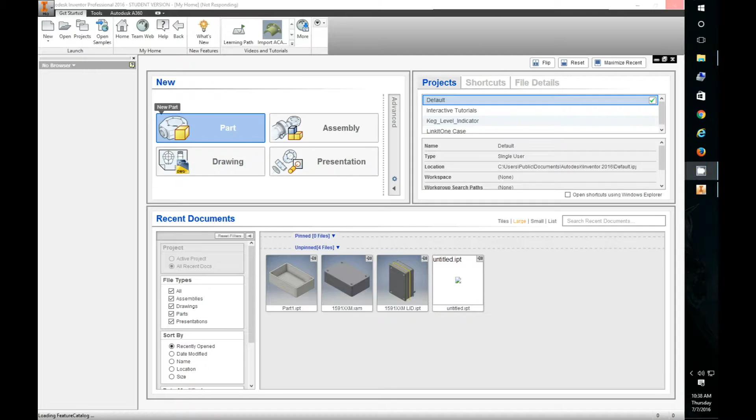So I've got it all set up, so we're going to need a new part. First thing we need to do is create a 2D sketch, so I'm going to click on that. We'll choose the XZ plane, that works fine for me.

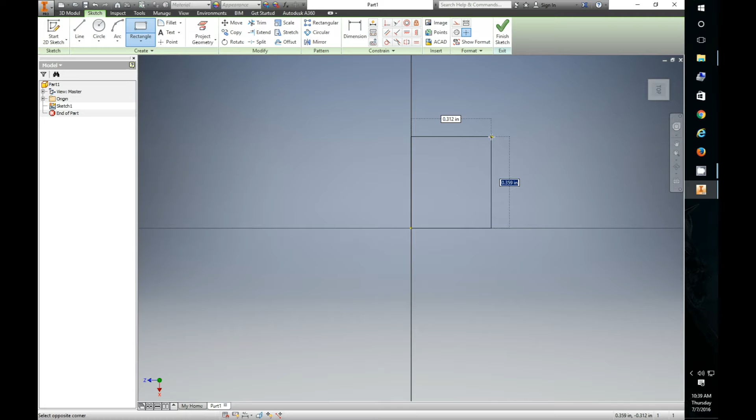Now we're going to go ahead and create a rectangle, so let's make it the outside dimensions of our box. It's going to be 3 inches that way, by 1.855. Okay, so that is our box.

So I'm going to finish that sketch, and then I'm going to extrude this up 1 inch. Now I'm going to move it up a little bit more than that, because when we shell this out, when we hollow this out, I don't want it to punch all the way through the block. So we want it to have inch-high walls, but we need to give a little bit on the bottom for when we punch through it.

If we punch through the bottom, and we did it at 1 inch, it's going to just hollow out this entire thing, making an entire hollowed box. That's not what we want. We want it to have a little bit of a bottom, so we're going to give it a little more, let's give it an eighth of an inch. So we'll bring it up 1 and 1/8 inches essentially.

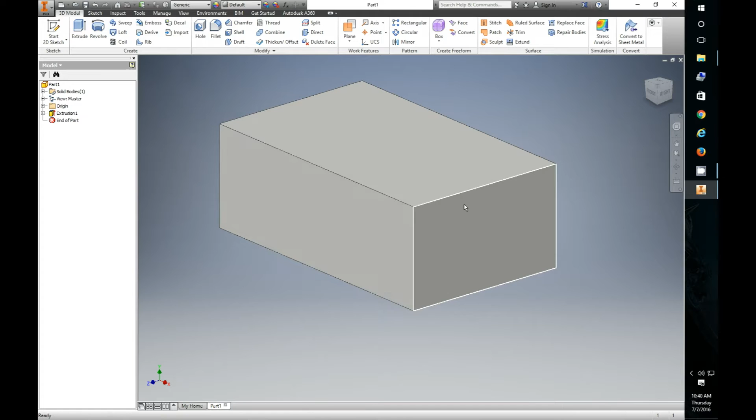So there we go. Now we need to hollow it out. So what we're going to do is right click on this surface, choose a new sketch, and we will create our new sketch.

Since we're hollowing it out, we could use the shell command. Let's see, where was that at? We could use shell, but the problem with shell is it's a uniform scale all the way around. You tell it what thickness and it'll do the same thickness everywhere. Well, ours is going to be a little bit different because we have specific dimensions that we need this hole in the middle to be.

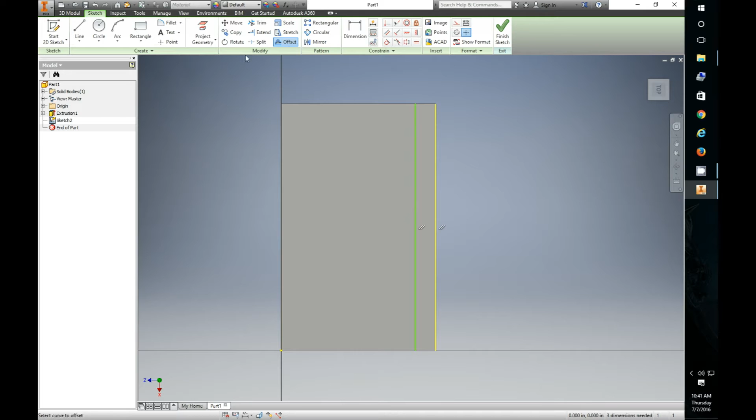So what we're going to do to make sure we get it right is we are going to project geometry. We're going to project this one side to start with, okay, and then we are going to offset that side, bringing it out a little bit. And then we're also going to do the same thing with the other edge, project that geometry and offset that one a little bit.

Now, I don't want this other edge, so I'm going to hit the escape key and just delete it. Now I'm going to dimension these. I need a dimension from here to here. That's fine for now. I also need a dimension from here to there. And that's fine for now.

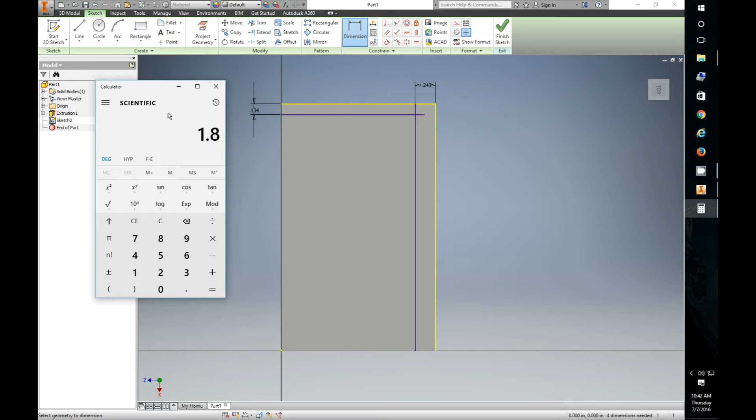Now, to figure out what these dimensions need to be, basically where this box in the middle is going to be, we're going to need a calculator. So I'll bring up our calculator. All right, let's figure this dimension first. We know our total box width is going to be the 1.855. Now we have to subtract the width of the inner box, which is our 1.4. That gives us the total of what's left over.

Now, since we have two sides, the top and the bottom, we have to divide this number by 2. And that should be our dimension for right there, 0.2275. So we're going to go ahead and do that. 0.2275. Enter. So that's our dimension that way.

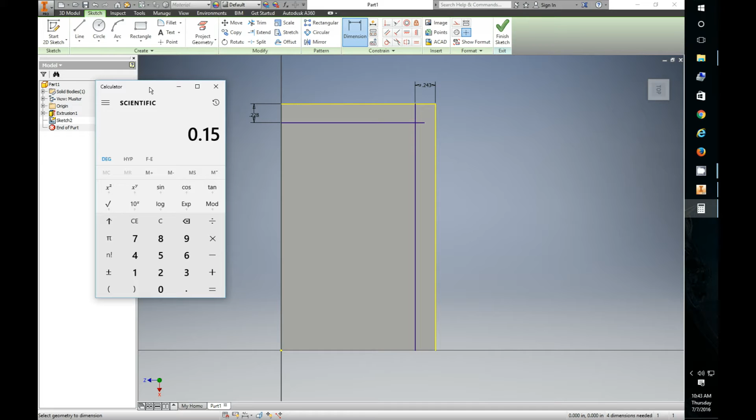Then we pull our calculator back up, clear this out, and do the other dimension the other way. So now it's the length. The length is 3 inches minus our 2.7 inches. That gives us 0.3. We divide that by 2, and we get 0.15. So this one is going to be a 0.15 dimension.

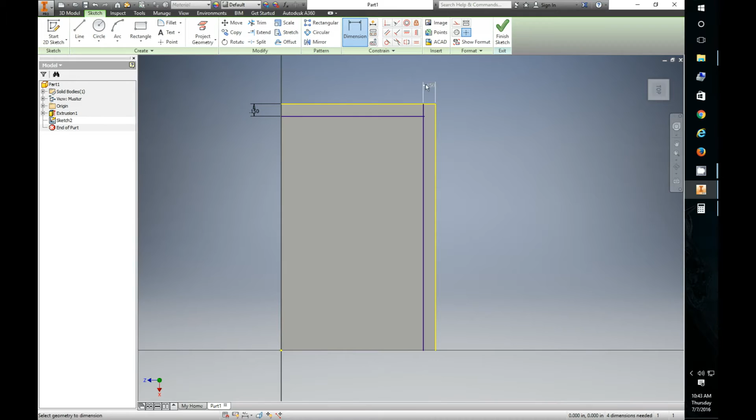And you know what? I think I just quite literally did that backwards. I'm sitting here looking at two different drawings. This one needs to be the 0.15, and this one needs to be the 0.2275. There we go. Sorry, I did that backwards. But basically, you see what I was doing. This one is the width one. That's where we take our two widths, our 1.855 and our 1.4, subtract and divide by 2 to get the width, and then the length is what this one is. You do the same thing. Hopefully that made sense.

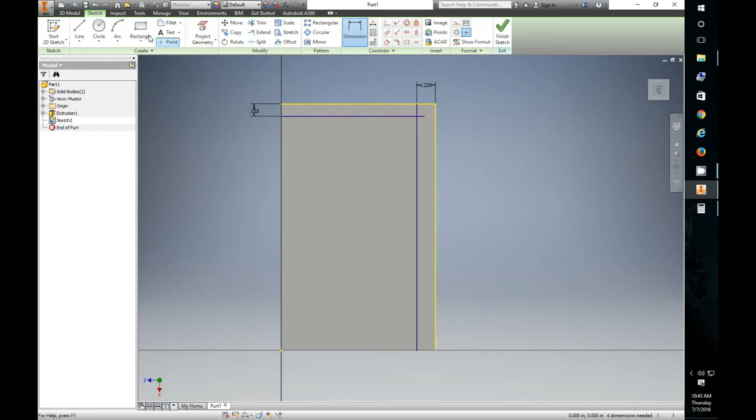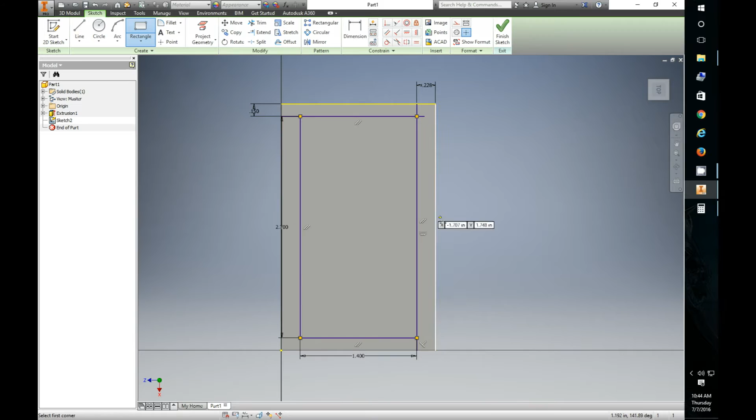So now we've got our corner point. This intersection of these two is the corner point of the box. Now we can draw a rectangle and snap to that intersection. I'm going to undo that, grab the intersection, and then we can dimension our inner box. It's going to be a length of 2.7 by 1.4. And there is our inner box. I'm going to finish that sketch. Okay, so there it is.

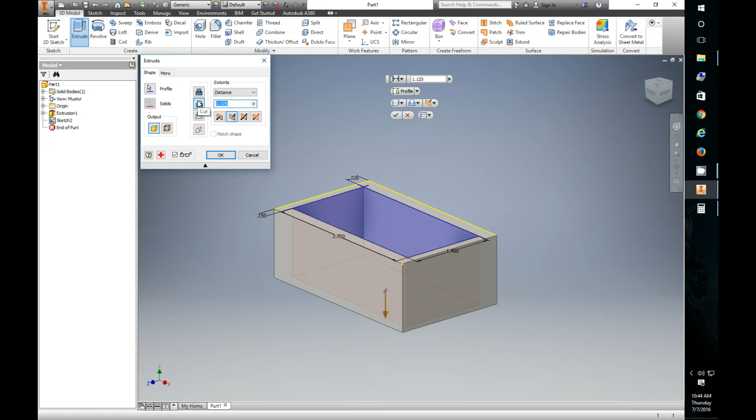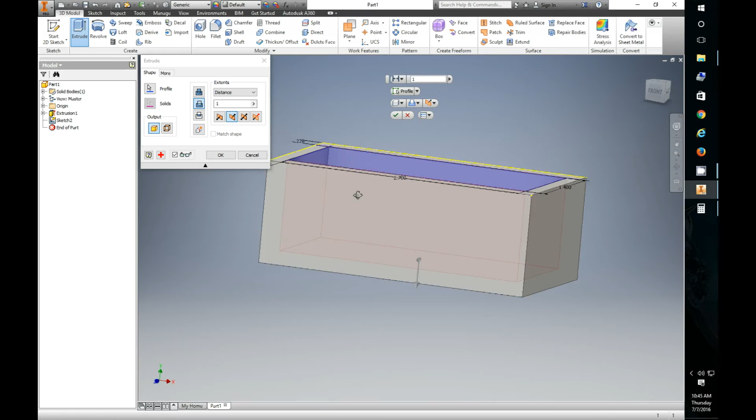Now we've got to hollow this out. The best way is to choose extrude again, click on our box, except this time instead of extruding up, we perform a cut. If I just leave it at 1.125, it'll punch all the way through. So we're going to do 1 inch, and now it doesn't cut all the way through the box. It's just in, 1/8 of an inch from the bottom. That's what I was talking about. So we hit OK. And voila, there we go.

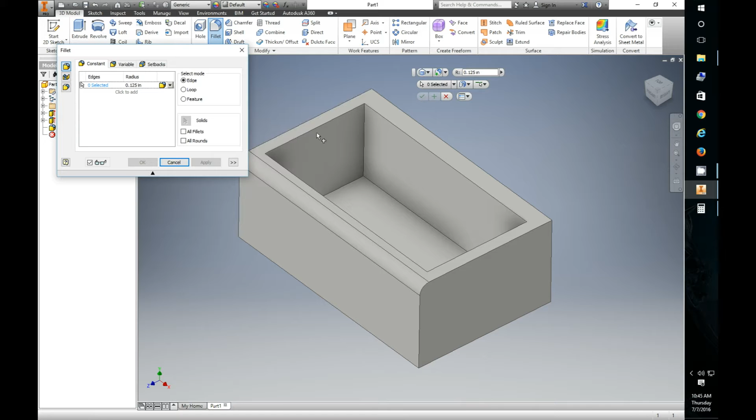Now to continue on, let's pretty this up a little bit. Let's do a fillet. 1/8 of an inch is fine. Let's do fillets around the edges. I should be able to click multiple edges here, at least theoretically. Yeah, there we go. We'll get all the edges here. That makes it look nice and rounded, so that's cool. So now, let's see what else.

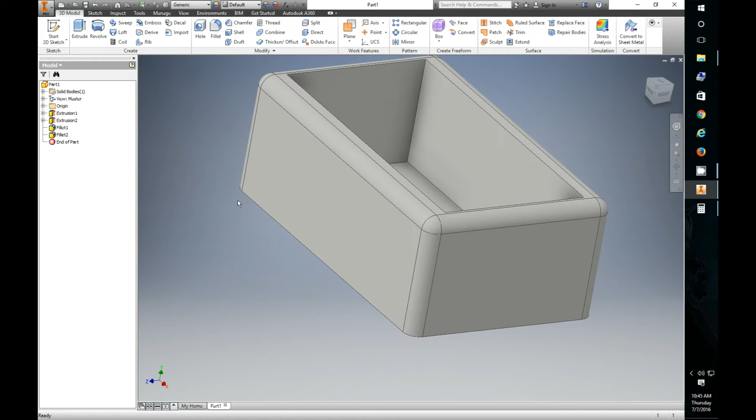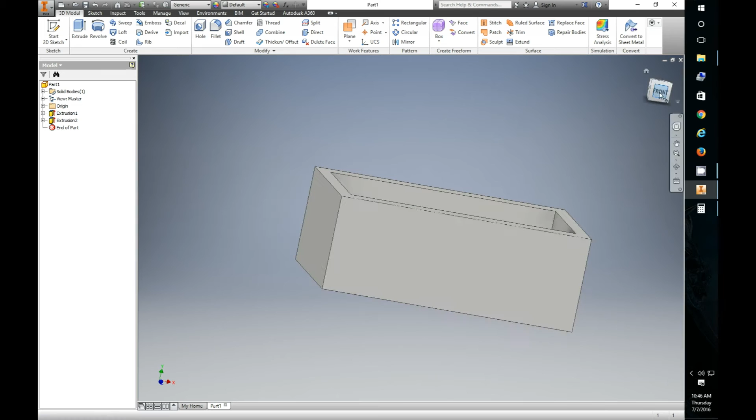Okay, so we have this all nice and neat now. Let's make some little finger grooves in the sides. We'll take this side, click front, new sketch, and make some sort of finger groove. First off, I need to mark where the middle is. There it is. Oops. I didn't want it to go angled on me.

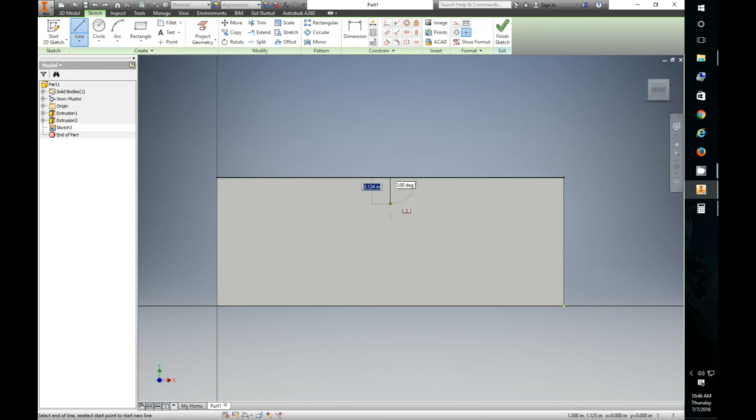Now this is totally live, so you guys can definitely see me do my thing. I think I want this to have an arc. Yeah, we'll try to draw an arc here. See what we can do.

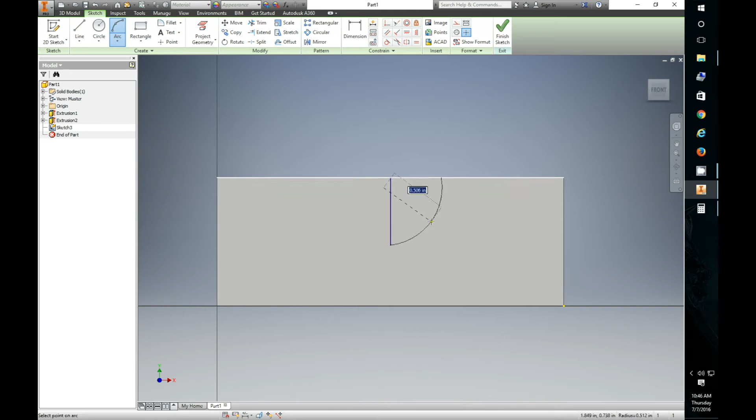Let's see, I can't remember how the arc tool works. Yeah, I think that's how we'll do it. Okay, so I'm going to dimension this. I want this to be... oh, that's a little extreme. Oh, my stupid AVG, I'm telling you. AVG makes me nuts at times.

Excuse me for that. So let's do 1/4 of an inch and see what it looks like. Yeah, probably a 1/2 inch is probably better. Yeah, 1/2 inch down. That's probably good.

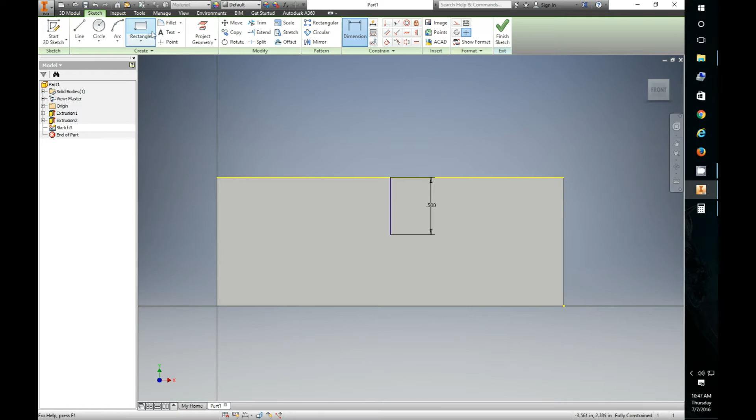Okay, so let's do an arc. And we're going to go from here to, I don't know, somewhere around in there. I think our radius, we should probably do 0.4. Probably. And I want a dimension from there to there.

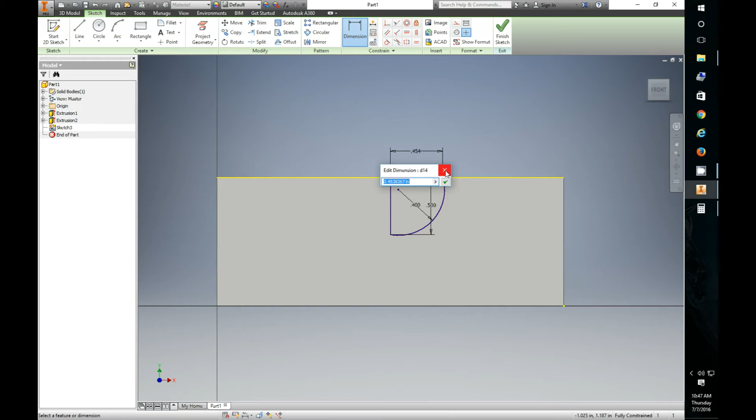Or maybe we should make it a 1/2 inch all the way around. Probably would be better. Let's undo that. Does 0.5 look absolutely awful? Yeah, I think 0.4 is probably going to be better. Maybe even 0.3. No.

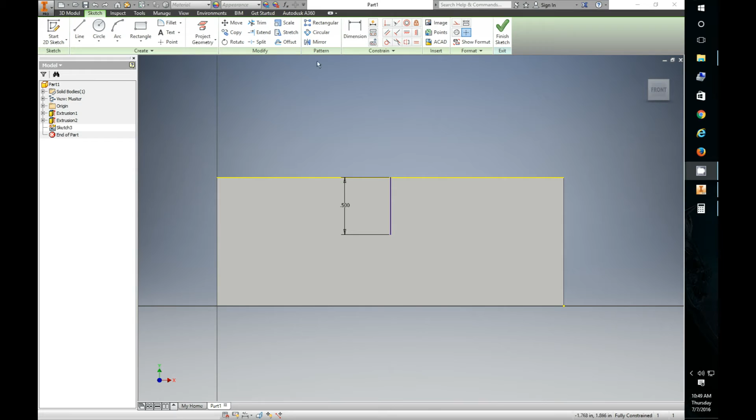Okay, so now what we're going to do is I'm just going to simply use the circle tool and make a circle here. And then what we're going to do is we're going to trim off the top of it. So there we go. So there's our kind of half moon kind of finger hole.

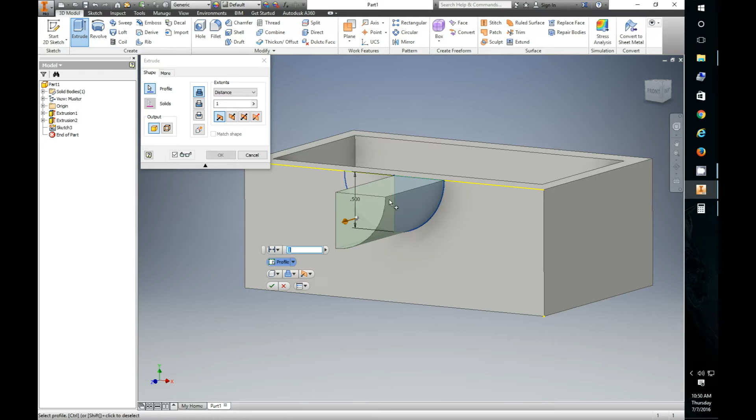So we're going to finish our sketch. We're going to extrude. Oh, we need both pieces here. Except we're going to do another cutting extrude. So now this one we can go big and go like 2 inches, and that way it goes through both sides. See? And then we're going to hit OK.

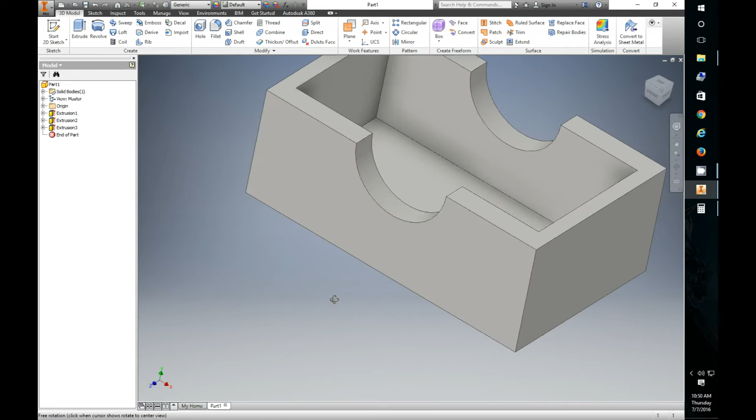And that's going to give us our little finger holes where we can grab the battery and pull the battery back out. Now, another feature that we need to do is we need to have slots in it so that we can mount it to the copter. So what we need to do is we need to cut slots in the bottom.

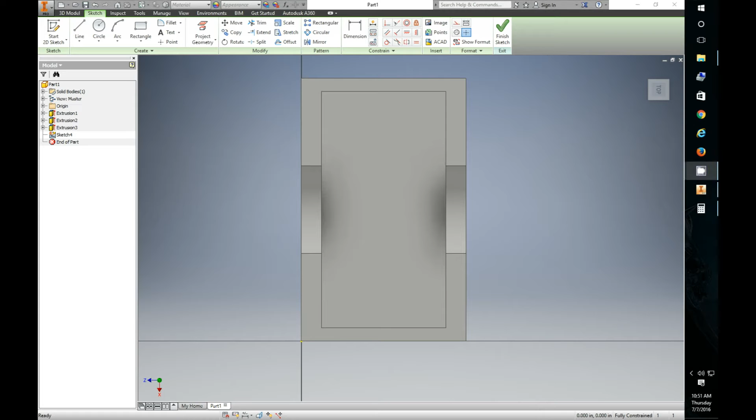So we're going to create another sketch in the bottom. And this is where our other dimensions come in handy. So we're going to do basically the same thing again. We're going to do our project geometry, grab this corner, then we're going to offset from that a little ways.

And then we're going to have to project the other geometry from the other side because we need the top of it. And we're going to do the same thing, offset, pull that in. Except we're going to delete that one side because we don't need it.

Now we'll go ahead and dimension everything. Let me tell you, you dimension so much in this software. So there we go. Now, again, to figure out our dimensions, we're going to have to go back to our calculator.

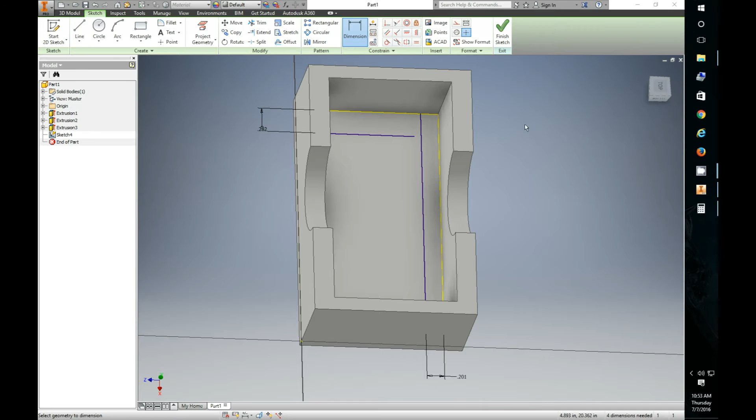Okay, so it's going to be about... and of course, actually wait, we don't need the calculator because we know the dimension. Never mind. So it's going to be about 1 inch down. So we want 1 inch down. And then we want the slot...

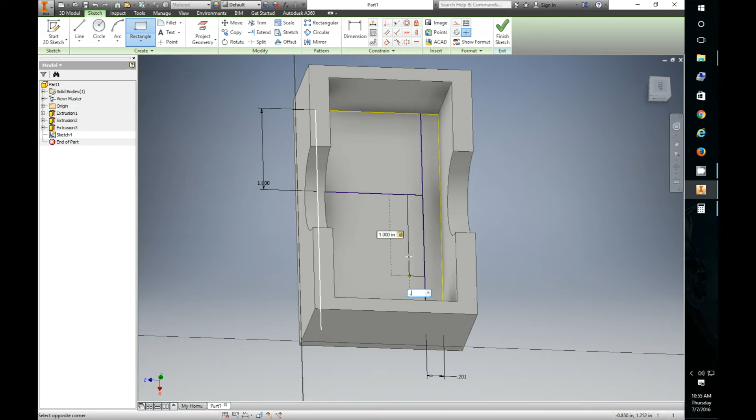Make a small rectangle. So it's going to be, excuse me, I hit the mic. It's going to be 1 inch long by approximately 0.125 wide. So we're going to hit enter. So there's that.

Okay, and then we're also going to take and let's see if I can do this. I can't remember if I can. Yes, I can fillet it. So what we'll do is we'll fillet this. Oops, I didn't set the... okay, so we're going to fillet this probably 625, probably like that, maybe. Yeah, maybe a little more than that.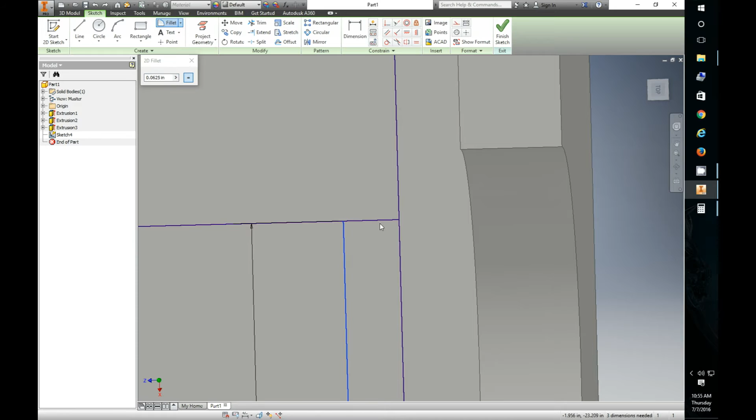Looks like it didn't take. Let's go this one with that one. And this one with that one. Okay, and then down here, this one with that one. This one with that one. There we go. Now there's a nice slotted hole.

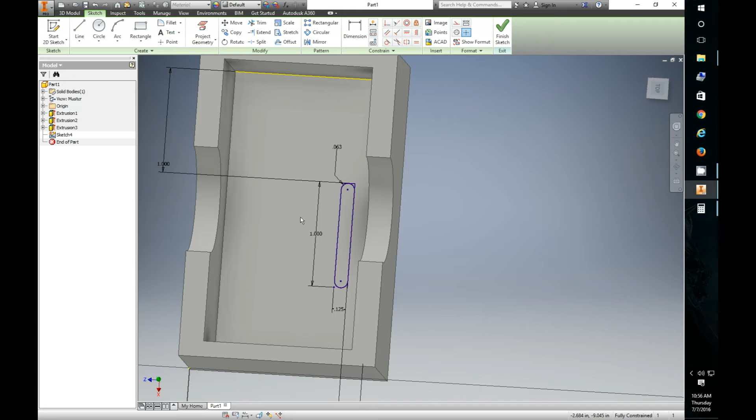Okay, that we can do. All right, so there's that one. Now we need the distance between the holes because we need to do basically the same thing. In fact, I think we'll just mirror it. So what we do is, let me go to the top here.

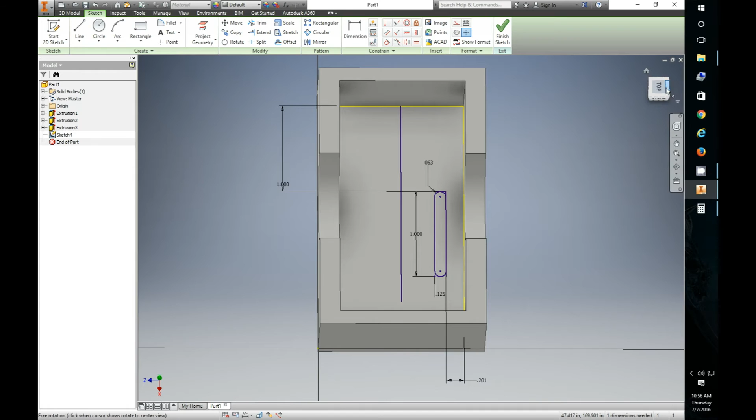And I'm going to give it a slight bit of curve. I'm going to make a line right in the center. Hopefully I can get it to center up for me. There we go. So that's our center line.

So now we're going to attempt to mirror this. Select, so we're going to select this. We're going to select our mirror line as that. And we should apply it. And there we go. So now we've got a mirrored image, we've got the two slots so we can mount this to our copter.

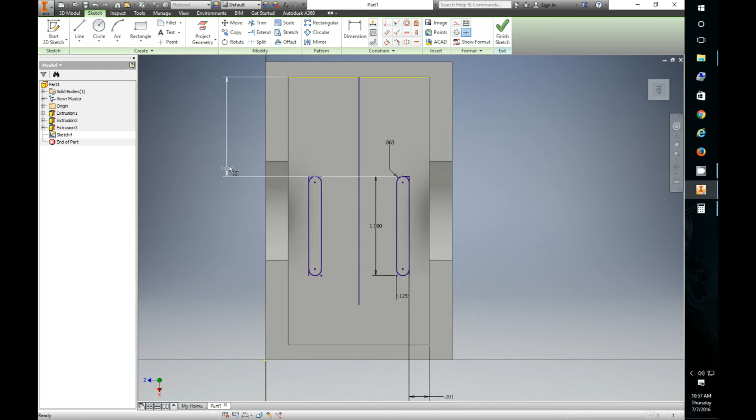Okay, so now what we're going to do is we're going to finish the sketch, and we'll go ahead and cut this out. So we're going to do an extrude, this one and that one.

Except we're going to go the other way. And you can leave it at 2 inches. It's fine, we're just cutting holes. So, okay. And there's our slots. So there we go. So there's our slots for cutting it in.

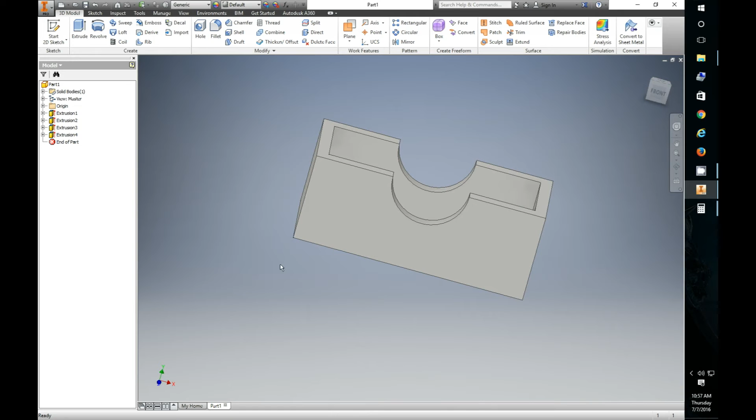So now we need the same thing for our battery so that we can hook our battery in. Now, the battery is close to the edge. I'm going to pick this side. Why not? Let's pick on this side. So now it's kind of over here to the left. So what we'll do is we'll just cut a notch in this. Okay, so I'm going to create a new sketch. We're going to do the same thing again. We're going to create a notch in this guy.

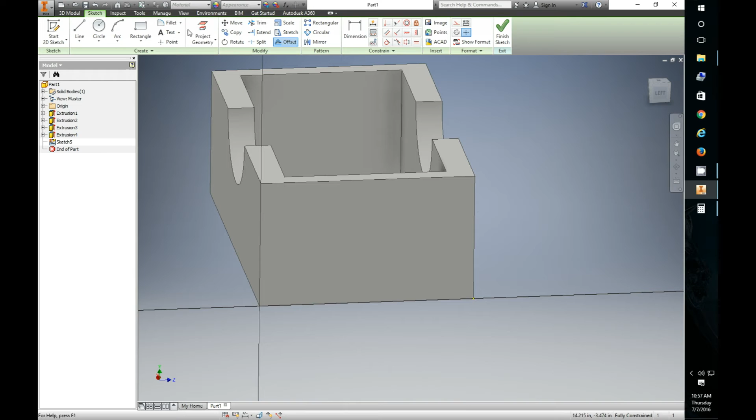So I'm going to do an offset. Look, I got to project the geometry first. Project the geometry. Then we're going to offset from there. We'll create this notch, I don't know, somewhere around in there, maybe. Does that look good? This is all guesswork right now, so I'm going to go ahead and do that.

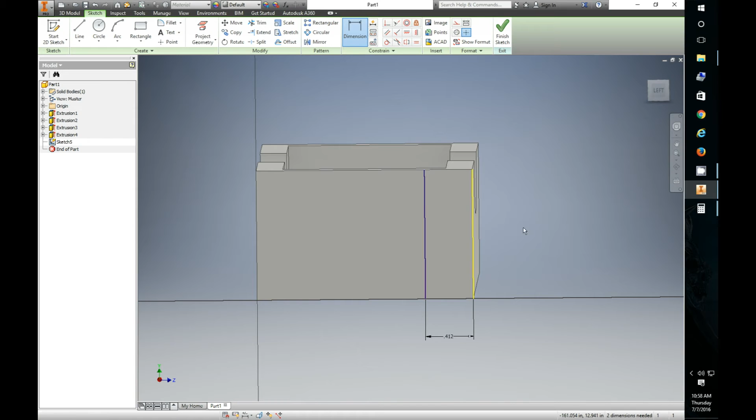I'm going to go ahead and throw a dimension on it just so if I need to alter it later, I can. Throwing dimensions are nice because then once you've extruded, if you need to go back, you can always come over here and open up the extrusion and change around the sketch and actually change this around a little bit. So that's what I'm going to do for that.

And then we're going to take this and I'm going to project some geometry because I don't want this to be exactly from the bottom. So I'm going to offset this up a little bit, do our same thing, delete this, and then throw a dimension on this here, from there to the bottom. There we go. And I'm actually going to probably move this up quite a ways.

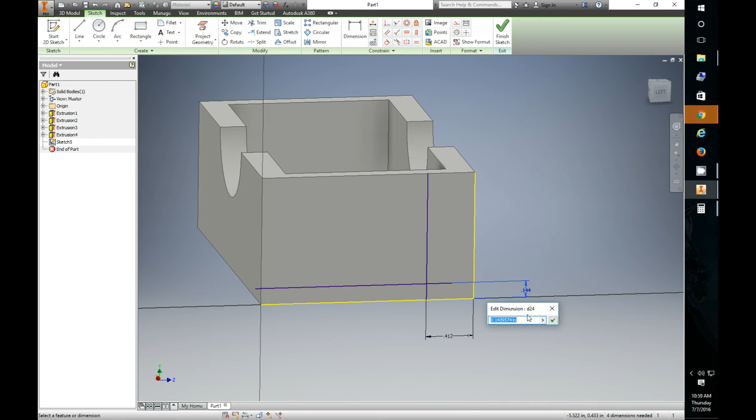I'm going to move it up to about, wait, I got to get out of my dimensioning tool first. Okay, we're going to move this up a ways if I can. Well, we're going to have to do it with the dimension since I put it on there. All right, so let's go up a 1/2 inch. Yeah, let's do that. And basically we can cut a slot in this now.

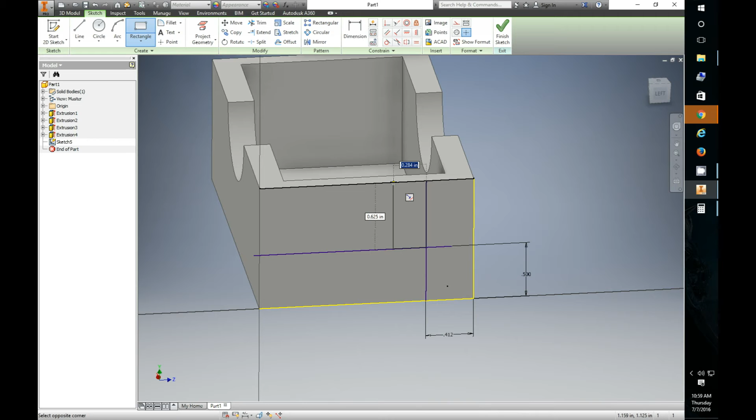So I'm going to take my rectangle tool, draw me a slot just about like this. Let's see, I don't know. Let's make it maybe like that. About that big. Again, we're going to dimension it out. Oh, and of course, I've over-dimensioned the sketch. Oh yeah, I don't need a dimension on that.

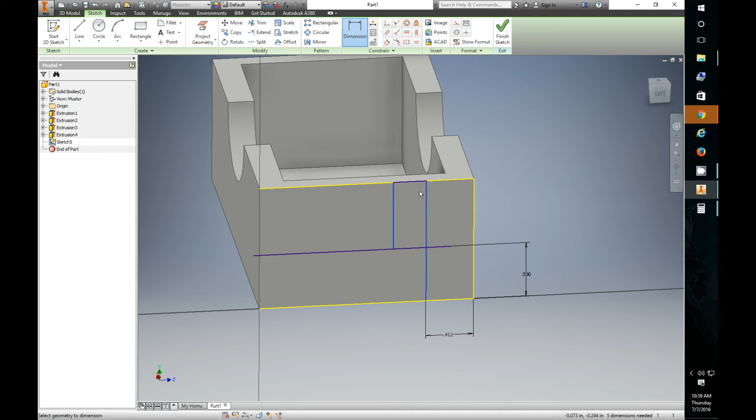But I do need a dimension from here to there. Oops. Dimension from there to there. We do need this dimension. So there we go. So it's about like that. Okay, so we got that. So now let's go ahead and finish our sketch.

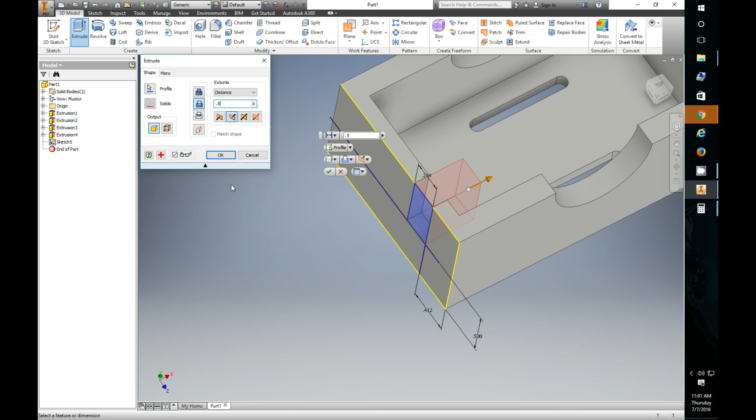And again, we'll extrude. We'll do a cutting extrusion. Doesn't necessarily have to be that long. We could even do just a 1/2 inch. And then we're going to say OK, and that'll cut us our notch. Now, this is pretty rough because it's very, very square. So what we're going to do is we're going to purdy this up a little bit with doing some filleting.

So 1/8 of an inch is probably fine. Is that? Yeah, that's a little too much. Let's cancel that. Let's go back into it. Fillet. I pushed the space bar to redo the last one. So let's see if we're at 0.125. We go 1/8 inch.

Sitting here trying to think. Let's do a 1/16 of an inch. So 0.0625, if I remember right, is 1/16. So then, yeah, that's gonna look nice. So we'll do that and see. Now watch this. We're gonna just fillet this sucker up. Fillet it everywhere. Why not?

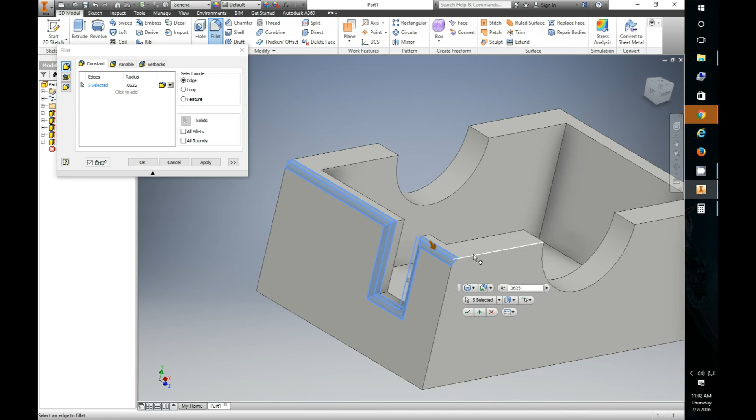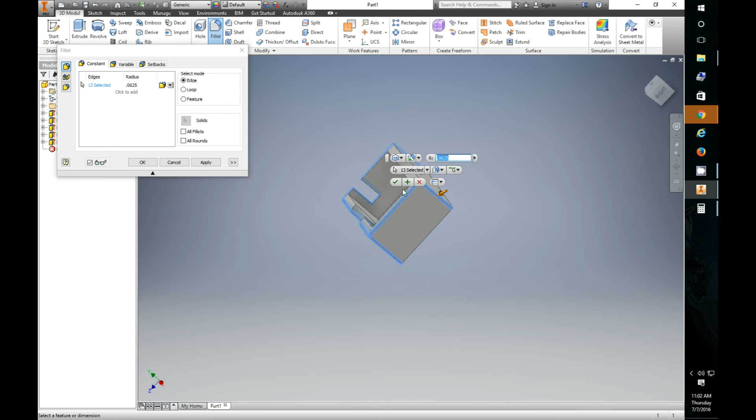Fillet the sides. We'll even fillet this, make it look spiffy. There's that. Yep. Come on, get out of the way. Fillet the sides. We're just gonna round it all out to where it looks nice. It's like the Apple feel to it. So we're gonna take

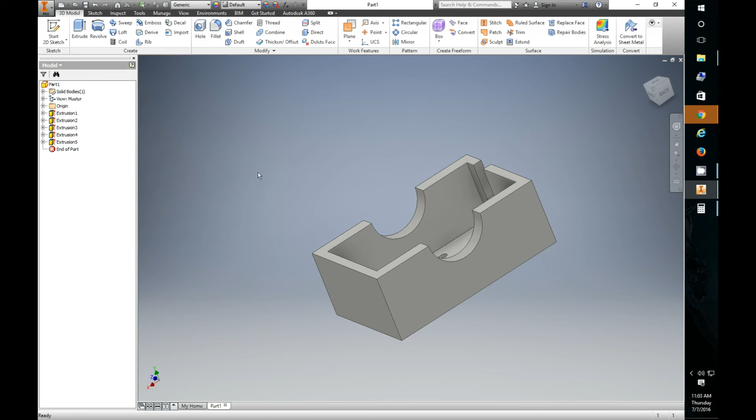Except now, since I clicked in that deal, it screwed it all up. I hate it when that happens. That little toolbar is just maddening to me. So let's try this again. 0.0625. This, that. And you just got to go through and click it all because it doesn't know what you want it to do until you tell it to do it. But be careful of this tool because you click on that and it just hoses up the whole selection process.

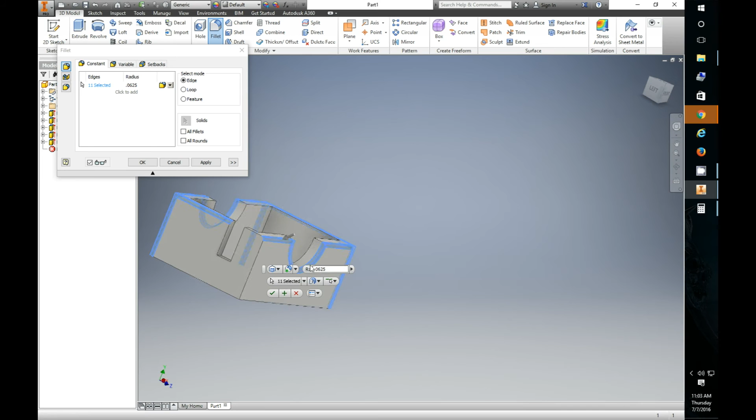All right, there we go. Zoom in a little bit. Get that, and get all this. And you can do this in multiple fillets by just calling the command multiple times. But I like to just go ahead and do it like this. Let's see, maybe do the inside? Yeah, maybe. Might as well.

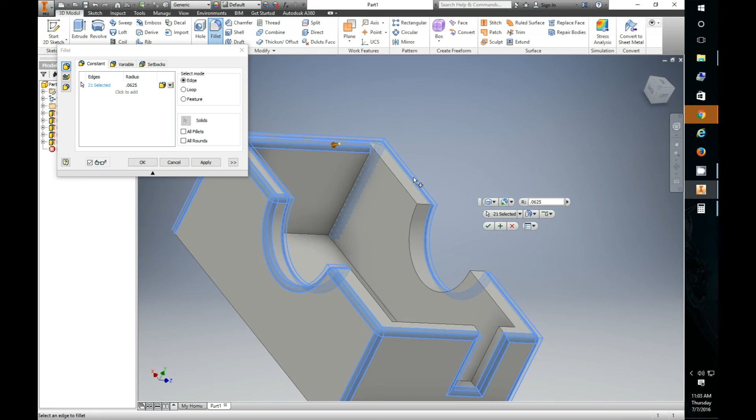Let's do it all. So let's get the inside, make it look all rounded and nice. Get all that. Did I get that other side? I can't tell. No, I did not. So we get that.

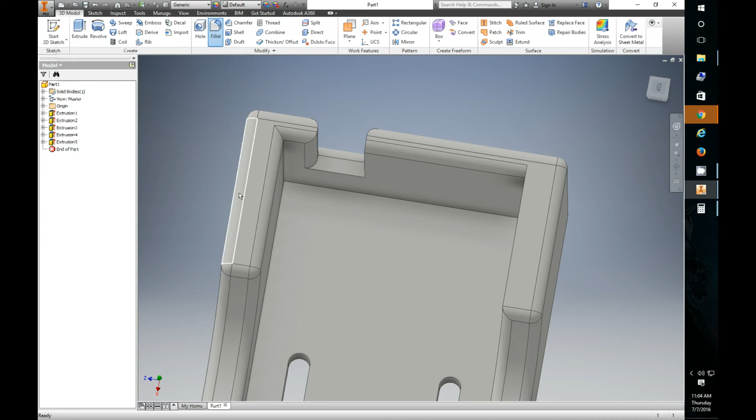Oh, I clicked the deal. Oh well, I'm gonna hit OK, and we'll just do another fillet. There we go. Round that all out. And see, this will make everything look all nice and rounded. Okay. So there we go. See, now that looks nice. So there's all the nice rounded edges and everything. And we can leave that bottom rough. That's fine. But there, now it's all nice and rounded.

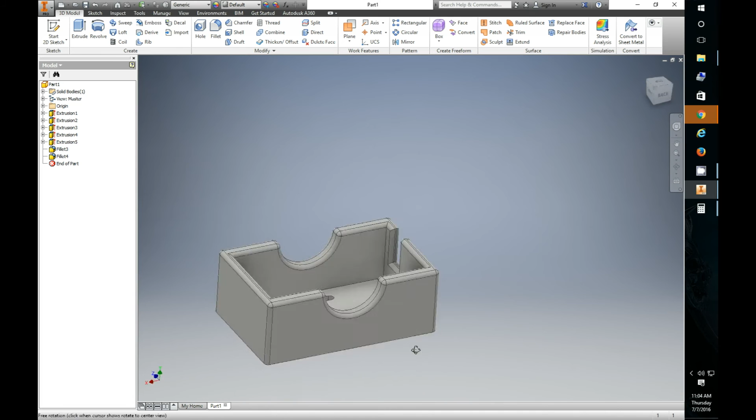So now we are ready to 3D print this. So the first thing we need to do is save it. So I'm going to save this. Go to my different things that I have. Oh, for some reason we're lagging out on me here. So we'll give it a minute to catch up. Okay, there we go. So let's try that again. Save as. And then I got to go to where I save all this stuff.

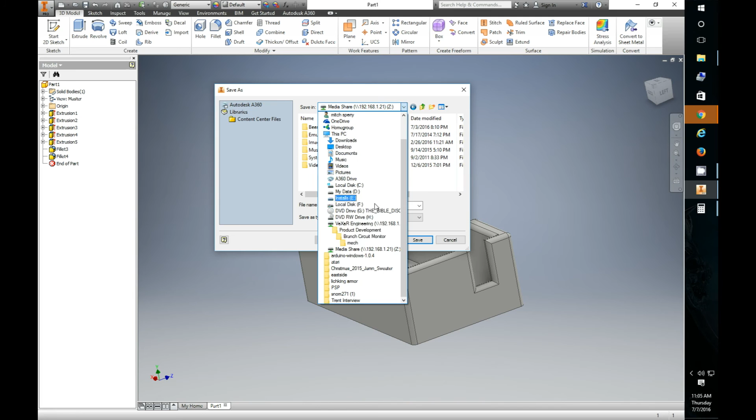Let's see. I need to go to my YouTuber stuff. Where's that at? Where's my drive? There it is. Okay. So we're going to go to our projects, to our development 3D printing battery holder. And there it is. We're going to call this the battery holder. Save. So we save our part.

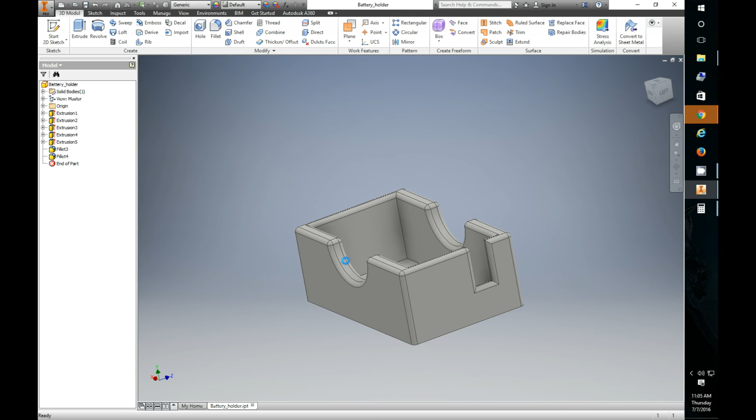Now, what we need to do is we need to set this as an STL, a solid model file. So we need to go to Export, CAD format, and this is where you can change the formatting. I'm going to change it to an STL, which is mainly what Cura or Repetier or most of the slicing softwares use. So we're going to hit Save. That should export that. So now I'm going to get rid of that.

I'm going to go down here to my Cura. We can get rid of that. And yes, I know that there's a new version. I'm not going to mess with it right now. So now we can load that in. If we go to our YouTube, our projects, and our 3D printing stuff, there's our battery holder. So now it should come in.

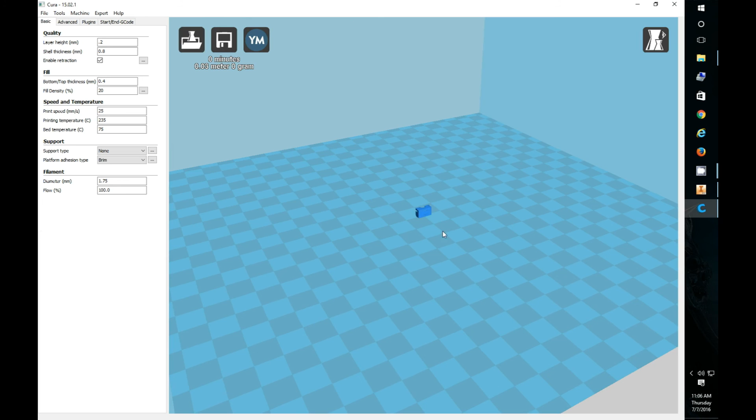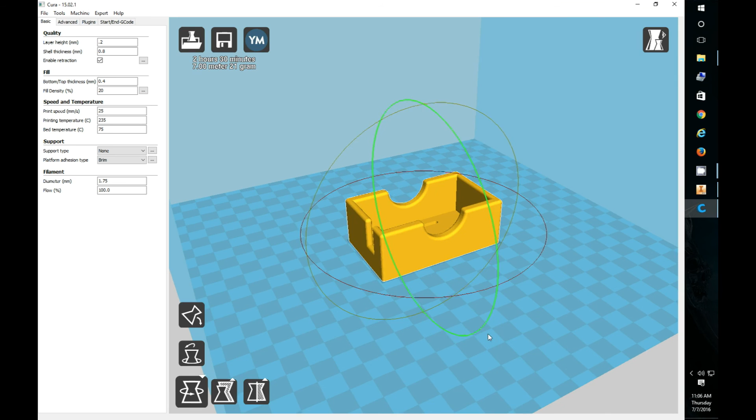And this is something that I've noticed that is weird with Inventor. Everything needs to be multiplied by 10. It's just weird. It comes in all kinds of strange. So maybe I've got the scaling wrong. I don't know. But if you just multiply it by 10, it comes out just fine. So it looks like we need to rotate it 90 degrees. And there we go. It looks like it's going to take about 2 hours with my normal basic settings.

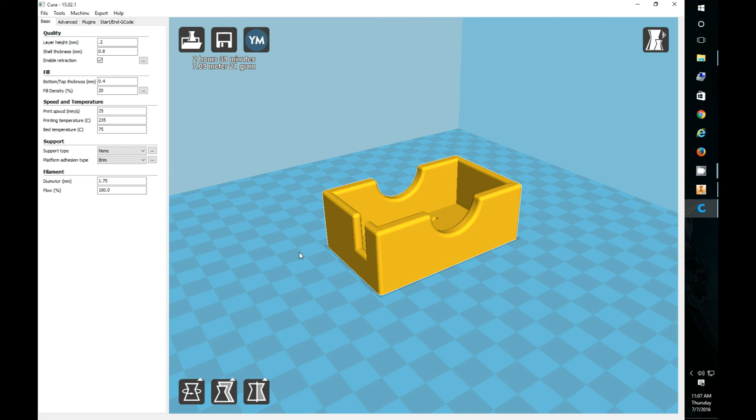So that's basically how you create a part. And I'll probably go ahead and print this out. Maybe I'll show it off in the next video, or maybe on a Maker Monday, what it looks like after it prints. It's going to take 2 hours. But I'm going to go ahead and print this sucker off, and we'll see how it fits on the little copter and everything.

Well guys, I know it's after the video, but I just wanted to show you what it looked like when it was finished. So there it is. Now, I did have some warpage going on because I did 3D print this with ABS. I may try doing it with PLA and see if I don't get a little bit better mesh on it. I probably didn't have the bed hot enough or enough adhesion, the ABS glue and all that, because to tell you the truth, I'm kind of running low on it.

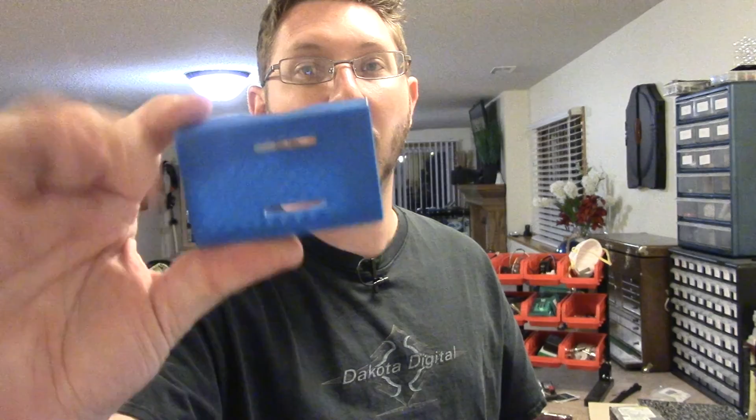But anyway, just real quick at the end of this video, I'll show you what it looks like. So there it is. Has the holes in the bottom so we can bolt it to the top of the quad. And I ended up having to move that over. I think I said something about that in the video. I don't know. If I didn't, I had to end up sliding this over. It wasn't over far enough.

But to show you guys that it really does work, here's the battery. Here's our little box. It fits just fine. There we go. So the battery will sit in the box. I can run a Velcro strap through the sides. There's enough space. We can Velcro it down, and then if we need to, you can grab it from the sides and pull it out. Perfect. So I'll go ahead and mount that up to the quad. It's very, very light. It's not going to add hardly any weight whatsoever.